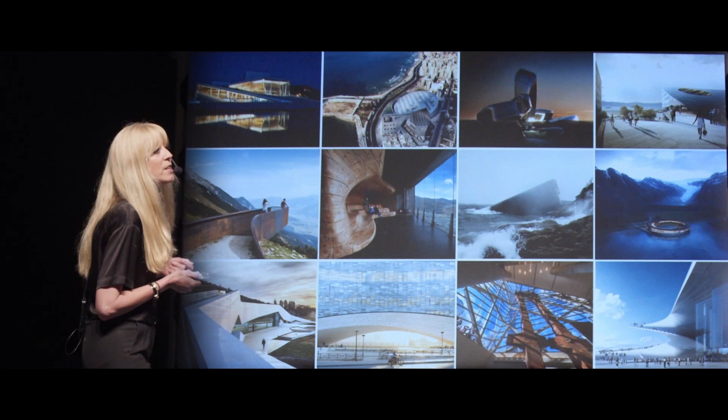So when you look at our design, our portfolio, you will see that it's quite diverse, and it's not driven by any stylistic preference. It's rather a result of thorough analysis of all the contextual framework - socially, environmentally, of course the site itself, but also the society, the context - and within this analysis we try to find an adequate response in terms of built environment.

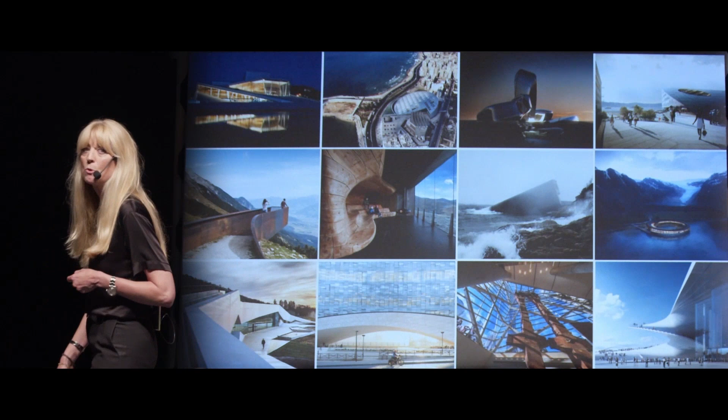You will also see that there's a kind of connotation you could relate to Nordic values, all related to accessibility, to democracy, and a kind of inclusivity. I think this is something that we very actively strive for and try to negotiate in all our work.

This is also embedded in the way we work - the collective intuition. Our latest publication is all about the integration of disciplines, the generosity and the collective ownership that is embedded in the design process, but also necessarily resulted in the built environment, and that architecture is always also a political domain. This is very much important. We are dealing with our earth.

It started with the Alexandria Library. I think it was to create this kind of generous public space - still the largest reading room in the world. But it was also about us understanding that we really strive for the worker to get proper working conditions, that the staff working at the library get salaries at an international level.

So we really understood what is a holistic perspective on sustainability. And the Oslo Opera is a continuation of this thinking and our approach to sustainability.

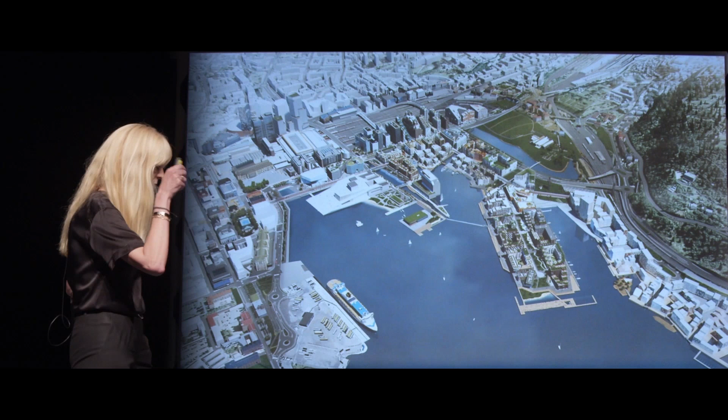This was also part of the urban development process where the opera was the first project as a catalyst of the transformation of a former harbor area. And this is now the urban plan. Should you come to Oslo, you will see how they embedded, used cultural building also as the catalyst for urban life.

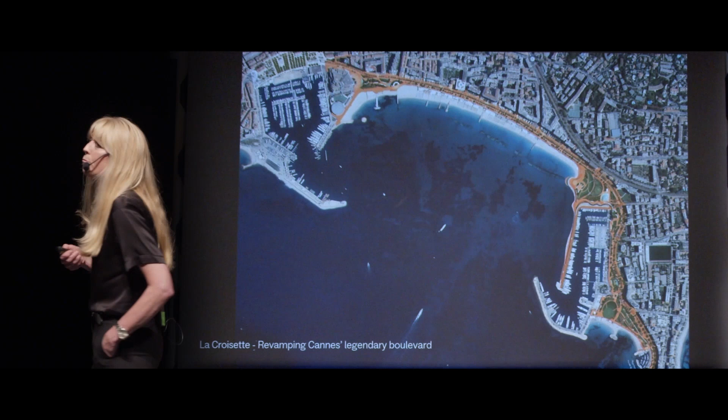And social values. This kind of continuation of thinking is also seen in our more recent portfolio.

We got an assignment of the retrofit of the boulevard in Cannes, La Croisette, a 3-kilometer bay walk. Here it's really about, it has a 1960s state, and what we are trying to do is reconnect it to the city, increase biodiversity, and also decrease all the commercial limitations when it comes to accessibility.

And also when it comes to the reconstruction of Times Square, which is the world's most visited square, 300,000 people a day, where it was mostly about giving this square back to the New Yorkers, because it was more about tourism. So we have been working with this over many, many years.

And it's not a very prominent design. It's infrastructural layers, working with different entrance situations, working with the stormwater, but also giving this kind of social infrastructure, because this square is also kind of a public foyer for all the Broadway theaters in New York. So similar to the opera in Oslo, you will be able to experience the opening of the Met Opera, or every 3 minutes before midnight, all the advertisement is turned into light art.

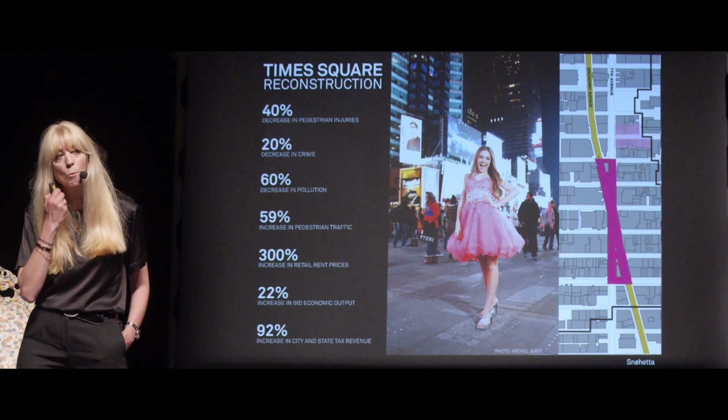So what we always do with our projects, which goes directly into our understanding of social and all the aspects of sustainability, is try to do a post-occupancy study of all our work and let this competence inform all the other works.

Going back to our roots, so to say, to the region Dovre, where the mountain Snohetta is, just to show you that also a very small building can demonstrate a public venue and accessibility. We were commissioned by the Reindeer Association Foundation to design a visitor pavilion, because in this region there is still the only population of wild reindeer in Europe. So this was about creating a kind of enclosed environment to give people the possibility to observe this beautiful landscape.

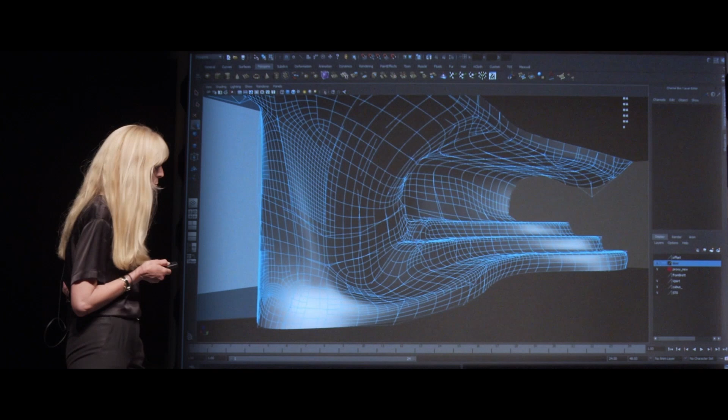So we're always looking, as you can see here, at contextual archetypes as references and borrowing this language to create our designs, but also the interior of the space, that is more related to the body, the physics.

And we are always testing our designs in our offices, where we have quite well-equipped workshops, and it's also about picking the timber, then following the process. The boat building company that was involved in the opera balcony balustrade then took it and created this kind of interior. You see, it's all about hands-on, and this is our smallest building.

It's only 90 square meters, and it's used also for educational purposes for the Reindeer Association. What we call keyless structures, so it's open 24/7 to anyone who wants to take the tour.

So you might understand a little bit, hopefully, where we come from when it comes to this kind of social sustainability understanding. But of course, this is very much to our heart, and since the last 15 years, we also consider the responsibility the building industry and architects have when it comes to the environmental crisis we are facing.

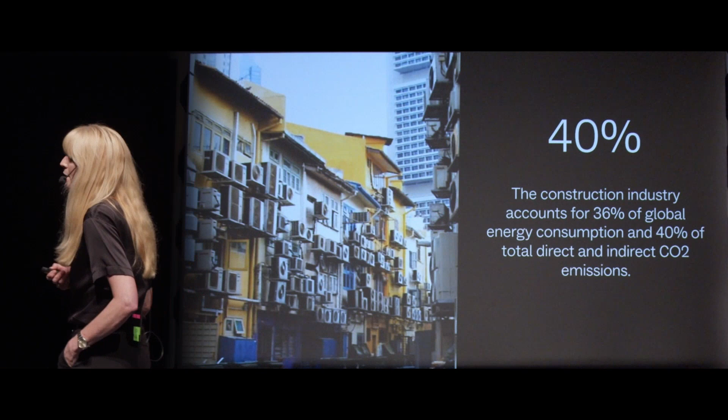This means that we are creating future-proof buildings, and it's still, I think, the more strict definition worldwide, because we are designing buildings that produce more energy than they consume, but we are also accounting for all the embodied energy in the buildings when it comes to construction, operation, and demolition of the building. We are accounting for 60-year perspectives.

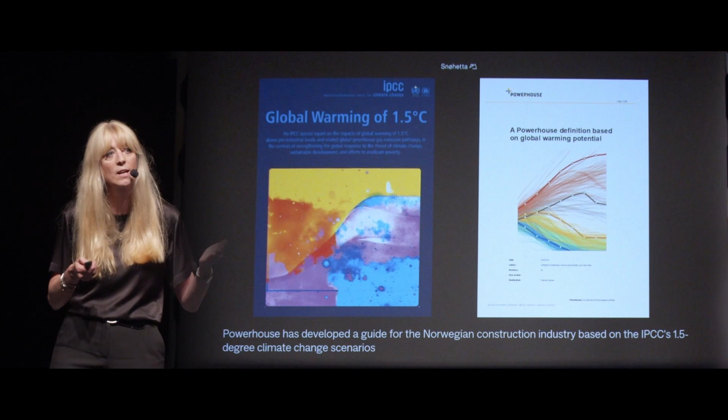And together with the Alliance, we have developed some buildings already. So it's actually not rocket science. It's that the operational energy demand plus the embodied energy in the building has to be less than the energy production that has to be produced on site, according to our definition. It also entails different design processes that are very interesting for us. And we also developed a guide for the Norwegian building industry, the full sector, on how we together can tackle and reach the 1.5 degree Paris Agreement.

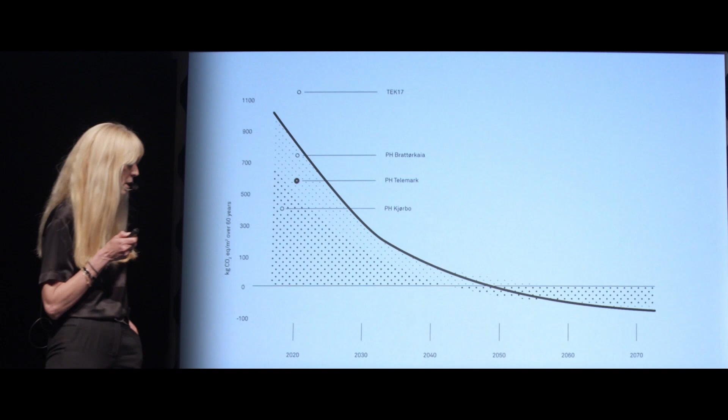So we have already realized four buildings, and what is interesting is that the retrofit building scores the highest when it comes to embodied energy. We also have other projects in the pipeline: an energy center, which is very interesting, a hotel, and also some student housing. I'll quickly run you through this retrofit building.

It's the refurbished office building of around 5,000 square meters. It got BREEAM Outstanding, and I think it's still the first of its kind in the world.

So again, these are the ingredients: how the building looked before, quite a generic office building of the 80s, but it was actually a listed building because the authorities said this is a typical building of this period. So we were limited in how to deal with the facade, so we replaced the aluminum facade with a wooden facade and reused it. It was dismantled and reused for interior design.

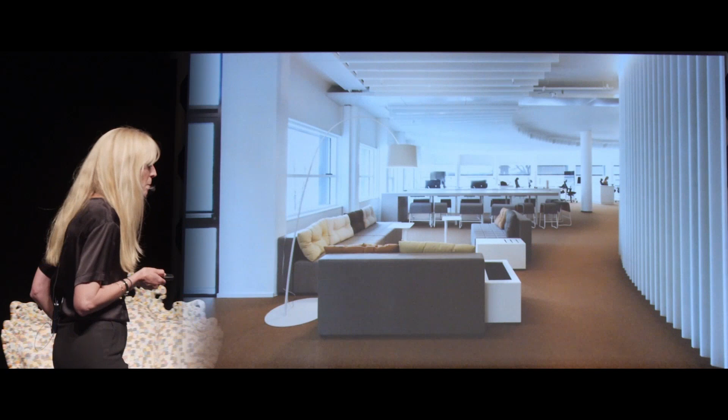This is how it looks today, and we managed to reduce the energy consumption by 90% compared to a conventional building. What's always a challenge in this building is getting access to the thermal mass of the concrete slabs and balancing this with the acoustics.

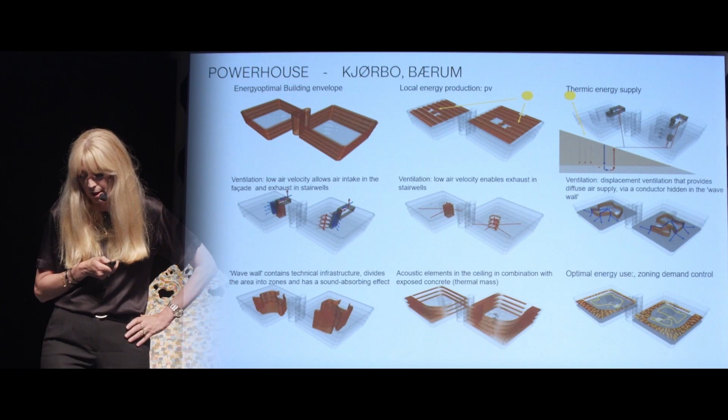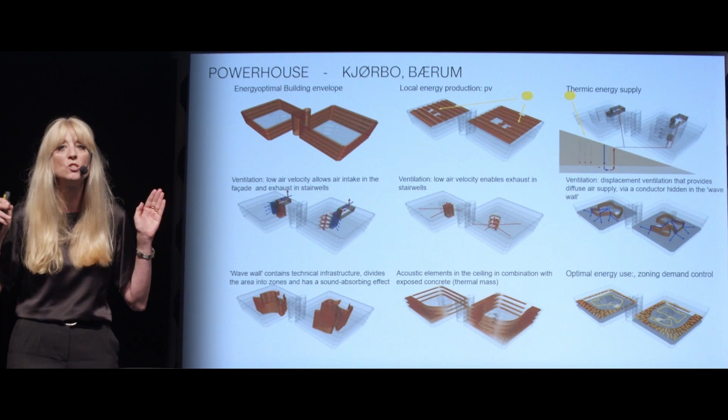But this is really about not reinventing the wheel, it's really about using the competence you have and putting it together in a different way. So really challenging all the different pre-accepted solutions, because we could, for example, use an emergency stair as a ventilation shaft, and this requires a very brave engineer. Together we worked with a set of criteria that allowed us to develop this solution.

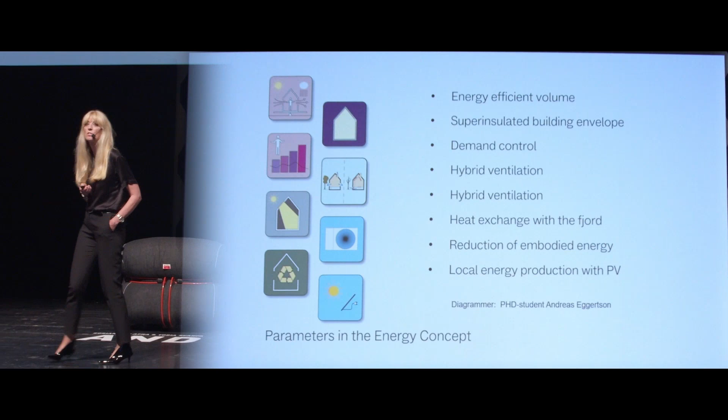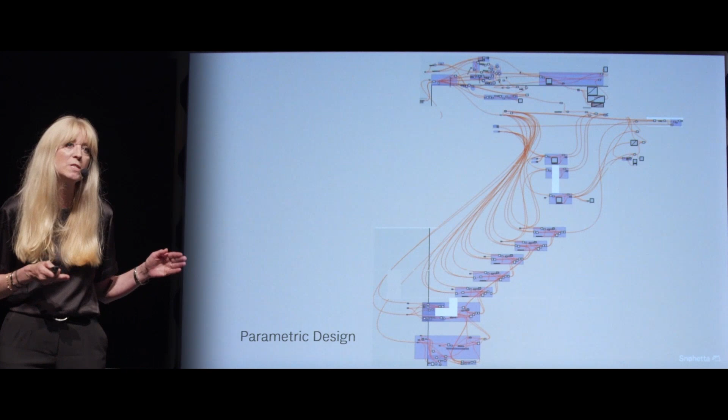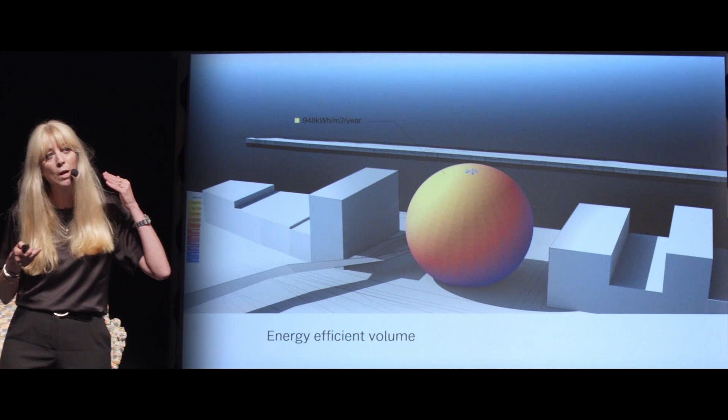So this is just a list of what we work with. It also requires high competence in parametric design, because all the solutions you make in the design process have a direct consequence on the energy concept and consumption. So you have to really quantify all the decisions you make in the design process. It's a very interesting process also, because it requires a different, holistic and interdisciplinary way of working.

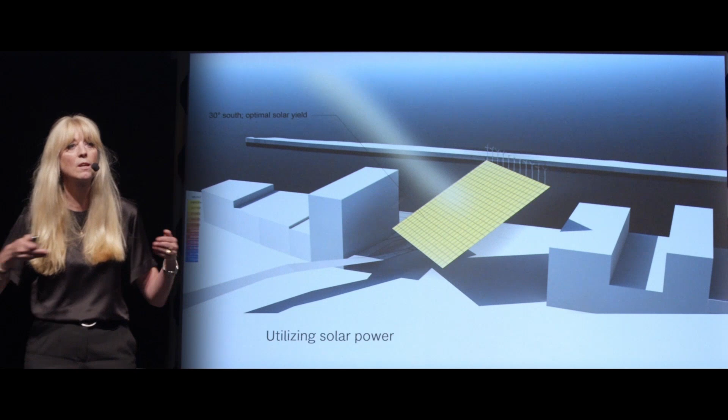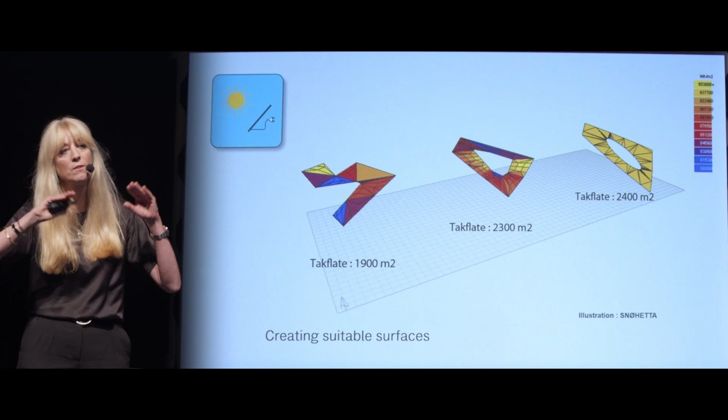These are all things we looked at: how to utilize, for example, wind, and also when you work with the roof, how to orientate and shape it in the best way so you can produce as much energy as possible, and utilize the facade. This is how it looks today - it's still the northernmost energy-positive building in the world.

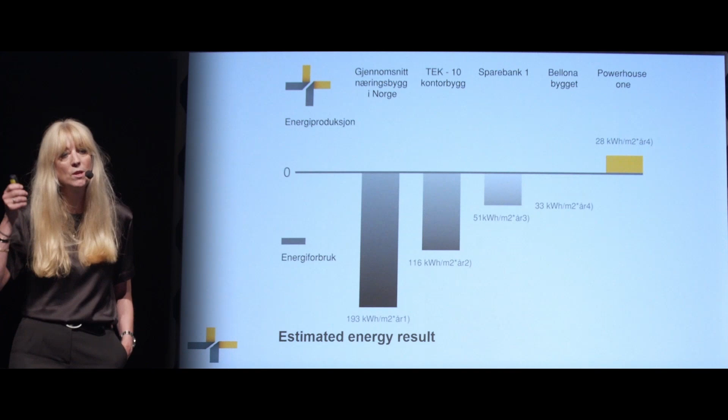So it also beats world records, and you see here compared to Norwegian standards how this, the yellow one being our project, scores.

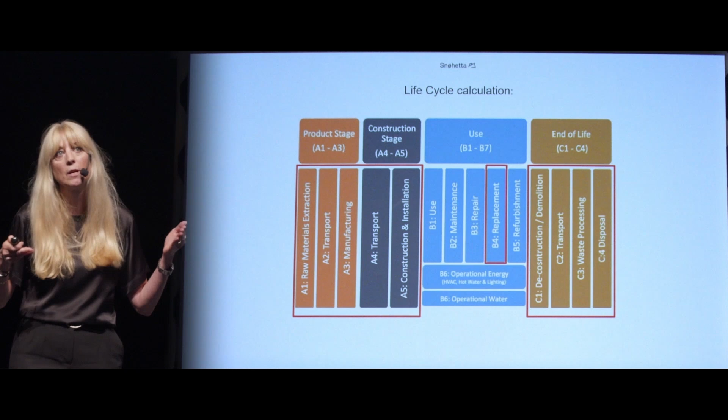So I think what's also important - this is a bit of a boring diagram - but when you look at the material passport and embodied energy, we account, for example, a window that has to be replaced twice. Also, when you look at what's most important in a building regarding embodied energy, it's the horizontal elements, the slabs, not necessarily the vertical construction. And the PV, of course, takes some account, but it pays back. So this building actually produces twice as much energy as it consumes, up to 400,000 kilowatt hours per year.

I have to go a bit quicker now, but as you can understand, this is all about material, material, material. That's why Snøhetta is also quite engaged in material research. We had, together with a Norwegian research body, a project on plastic, because there's a bias that it's all about virgin plastic. Plastic is dominant in the building industry for a reason - it's a synthetic polymer, light, doesn't rot, is cheap, comes in different colors, so it's quite a durable material, but it has, of course, a big impact on the climate situation we're in.

So we try to team up with partners in the building industry - here with a Norwegian fish farm - and we worked with waste products from the Norwegian fish industry to try to develop a chair. This is a relaunch of a Norwegian classic. So it's all about creating these pilots.

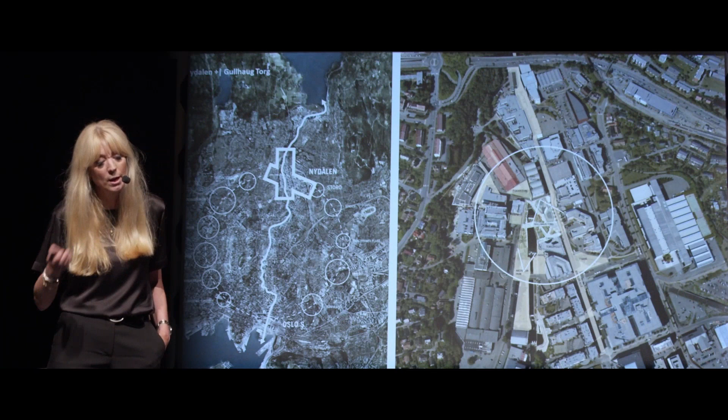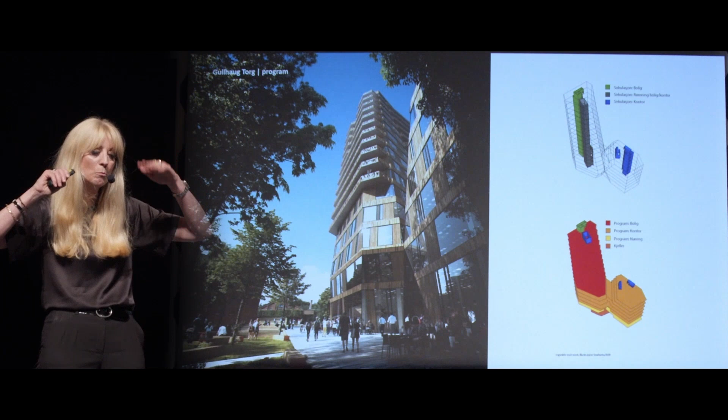Also this kind of tile collection with an Italian company made from e-waste. What we pioneer, another step further at least in Norway, is that we opened two weeks ago Norway's first naturally climatized mixed-use building. It's 18 stories high, and it's about to generate a new kind of neighborhood development. For us it's a natural continuation of our work with Powerhouse, taking it a step further. This building is mostly residences and offices with some commercial functions.

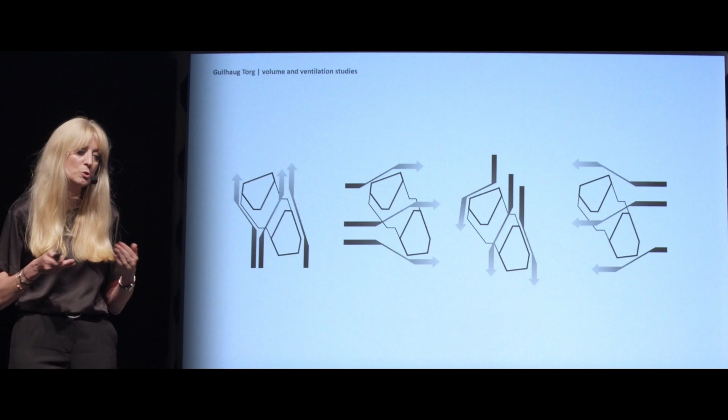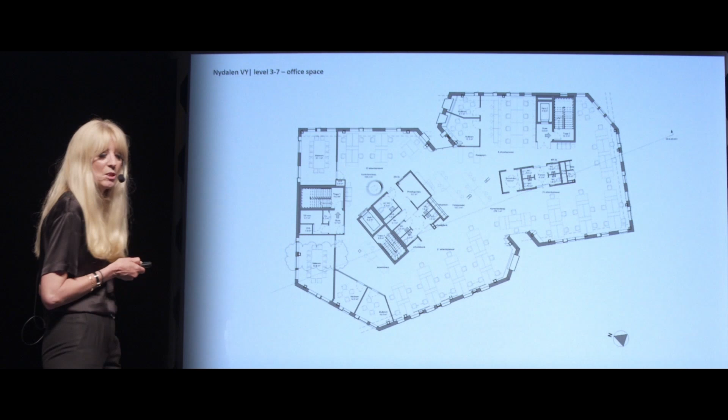It has a triple zero ambition: no energy is used for cooling, heating, and ventilation. With the form-finding process, when you look at the geometry, it was about creating a geometry that works with wind pressure to create a pressure drop, and it's shaped accordingly to allow cooling and ventilation throughout the building. You also see here the fitting of the windows on the construction side. A lot of wood is used in the interior to work with the fantastic capacity this material has.

I'll do this quickly, but just to give you an idea, when it comes to the residential part and the office part, normally you have a lot of ceiling height taken up by the ventilation.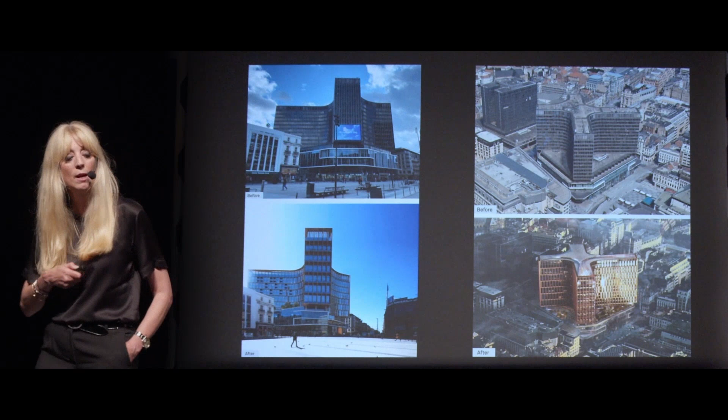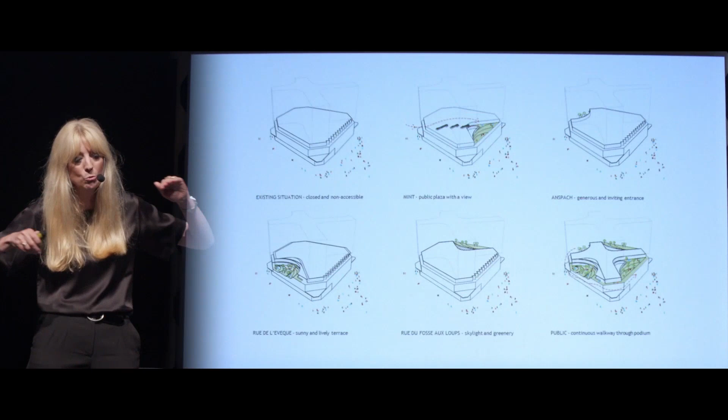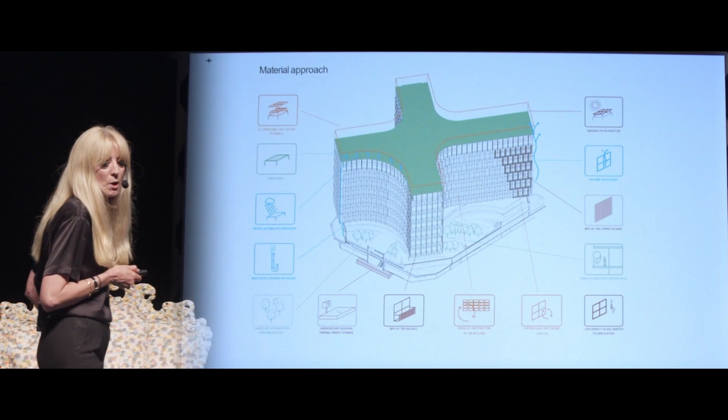When it comes to neighborhood development and retrofit at a larger scale, we're very much looking into repurposing existing buildings. We're working with this former post office in Brussels, Centre Monnaie, a 70,000 square meter building that we're turning into a mixed-use building and creating a kind of public venue. We're taking away a story of the podium and increasing public accessibility, creating a green plaza overlooking the beautiful opera house of Brussels. We also have brave clients here who are dismantling material, putting it back into a material bank, and making it accessible for the building construction industry.

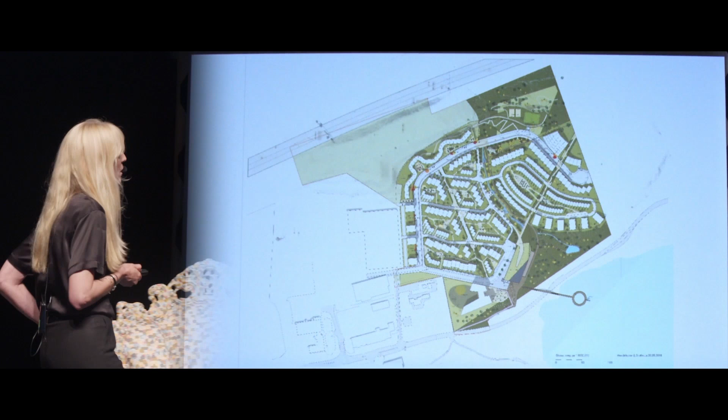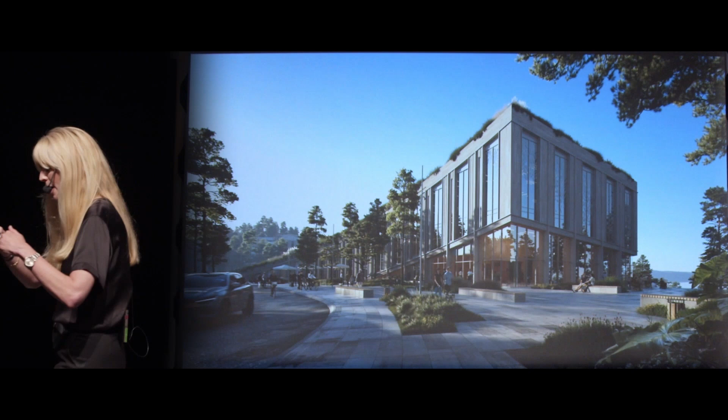Two more projects left, I'll do this quickly too. This is a project in Sweden, a former quarry, which will be home to more than 1,000 residential units. But here our client decided to start with the community building, the so-called lake house, which sets the tone for what the neighborhood will be. This building contains all public functions like healthcare, kindergarten, and co-working spaces. So they do it the other way around: they invest in the social realm first, and that sets the tone for the residential development.

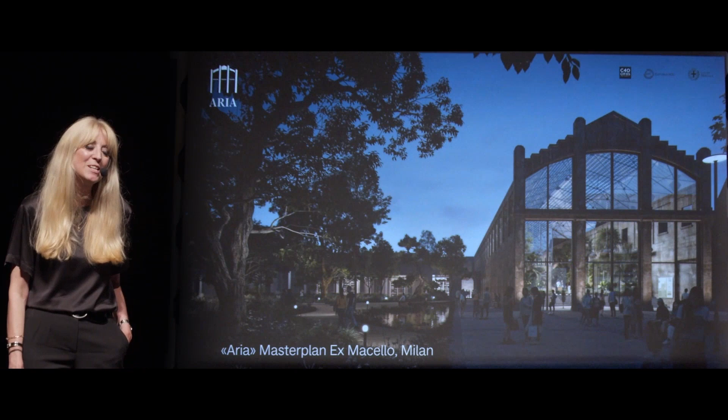Let me close my talk with the largest development we have on the table at the moment. We're working on the first CO2-neutral neighborhood in the city of Milan. It's the transformation of the former slaughterhouse area, about 300,000 square meters of construction. It was also about keeping the beauty of these industrial cathedrals, preserving 30,000 square meters of existing building structure, and saving 4,000 cubic meters of concrete.

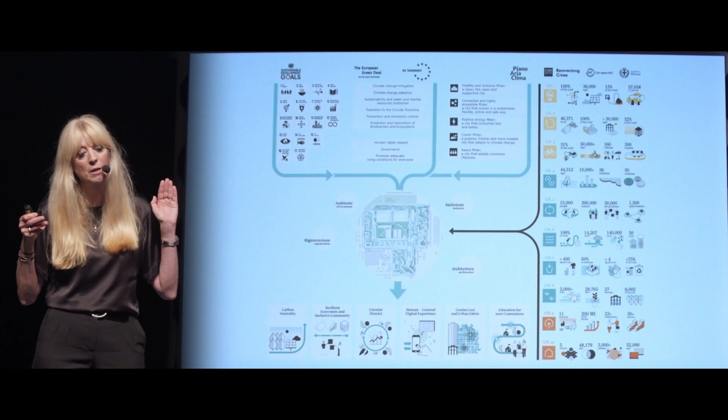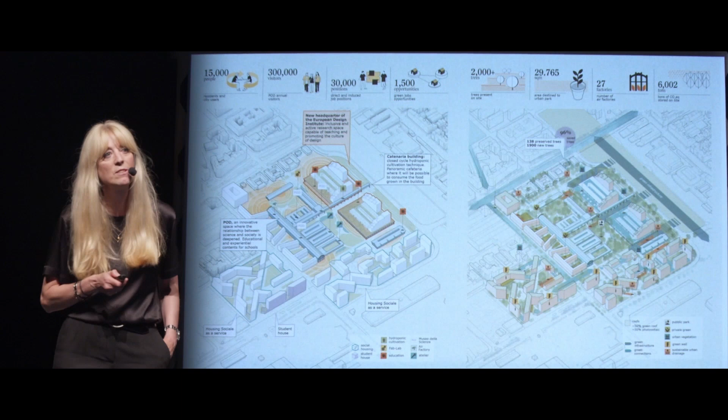This project requires a quite complex setup. Unfortunately I don't have time to go through it all, but just to give you an idea, it's not only at one building scale - you can scale it up, and it's much more interesting when you work at the community level, because then you have a completely different impact: how you work with the landscape, how you program the ground floor, how you actively work with landscape and nature to increase climate and soil cleaning in the area, and how you place different functions to create a vivid neighborhood.

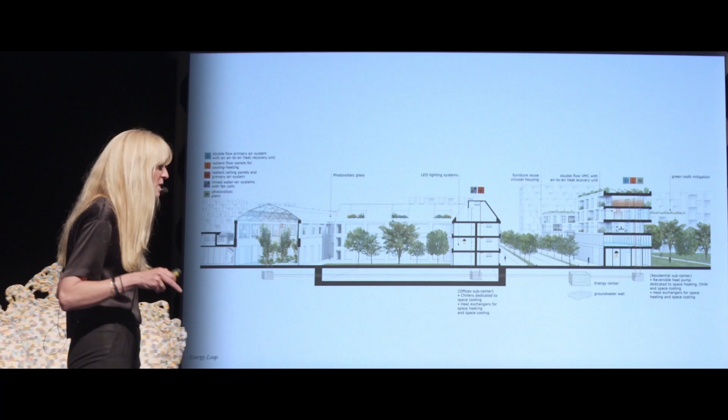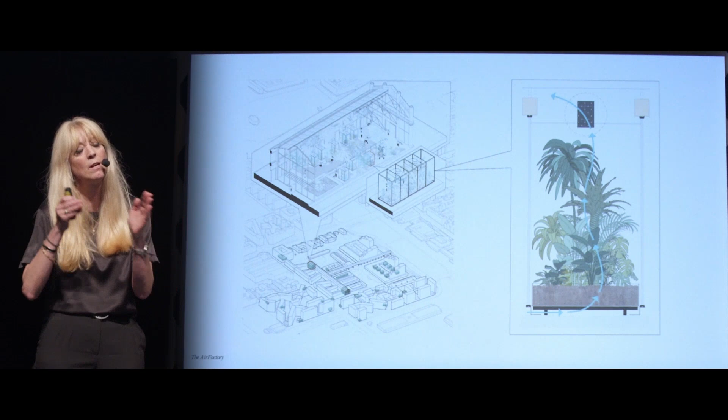So I think all of this, measuring the embodied energy, thinking in energy systems not just building per building, but having a new generation of heating and cooling that can have double functions - cooling at night and heating according to different programs and buildings. And again using research components, like with the Polytechnic of Milan, studying how plants can purify air, creating arenas for education as well.

And yeah, that was my contribution to the conference. Thank you very much for your time. Thank you.